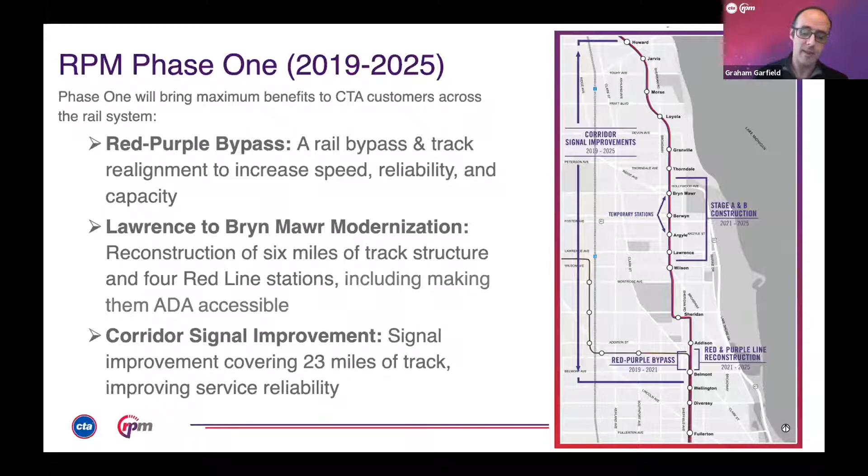Finally, we're doing signal improvements all the way from Belmont to Howard at the end of the Red Line. Even though a lot of that area won't get rebuilt in terms of track and structure, bringing what is currently a 1970s-era cab signal system up to current standards will not only increase throughput, but also simply improve reliability, given that a lot of the parts and infrastructure are becoming difficult to maintain and replace.

So what are the benefits? The benefits extend not only to our passengers, but to the communities. For those of you not familiar with this part of the Red Line, it passes through very densely populated neighborhoods. These are primarily neighborhoods of apartment blocks. There's retail, a lot of mixed use. It's very high density. Our neighbors are right next to us.

So we're bringing benefits to them through improved infrastructure as well as to our riders. They include faster and smoother rides through the provision of new tracks, bridges, viaducts, and the aforementioned signal upgrades, which will not only allow faster rides, but also quieter ones. By upgrading the signals and improving the track and structure, it allows us to provide more frequent service, which reduces crowding. And I mentioned the 4 new Red Line stations that will be fully modern facilities with ADA accessibility, so that we can have mainline transit access to more of our constituency.

It also provides economic growth. There's economic benefit to these stations, of course, just for the local communities, but we wanted this project to go farther than that. So we've developed programs for workforce development as well as a high level of SBE and DBE participation. And finally, we also have transit-oriented development planned post-construction for lots that we needed to buy and clear for construction staging and operations, but will not be needed once the project is completed.

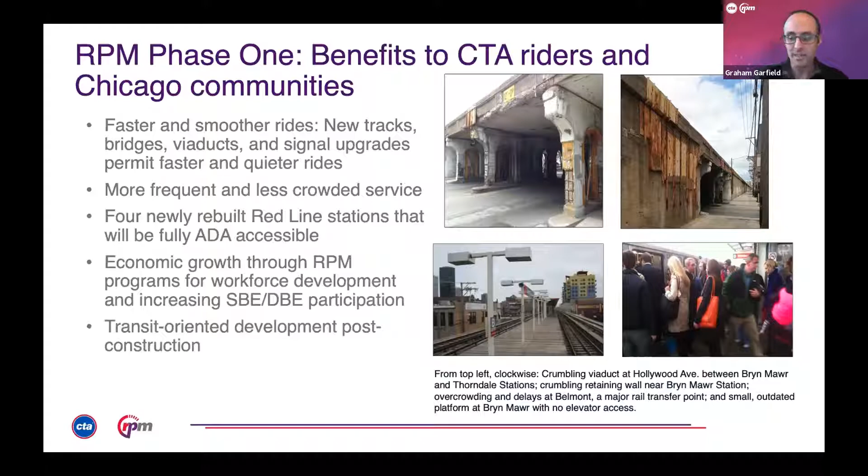So just a quick rundown of some key dates. This project has actually been going on for quite some time. We're really now in the very heavy civil construction phase of it, when a lot of it is very visible. There are things that, on the street, you can actually see taking form. But we've actually been laying the groundwork for this for quite some time.

As far back as 2018, we began a 3-year period of advanced utility relocation, working with a lot of local utilities, both public and private, to relocate infrastructure within the project footprint, so that when we began excavating and moving things around, we would not create any interruptions to those utility services. We had a project groundbreaking in 2019 for the bypass.

From 2020 to 2021, ending just this past May, is a phase we call pre-stage. For both the LBMM, the Lawrence to Bryn Mawr area, and the RPB bypass area, there was a lot of work we needed to do before we could even begin the main work - preparatory work and some more modest upgrades and improvements. But this was especially significant up north in the Lawrence to Bryn Mawr area, where we had to install

2 brand new interlockings at each end of the corridor to allow us to merge and sort trains from 4 tracks to 2 tracks through the construction area, as well as build some temporary stations and other pre-stage support work. But we're now into heavy civil construction in both of those areas, and the bypass is almost ready to be completed. We're going to show you some pictures of that, and Chris is going to speak to some of the exciting progress in that area. Construction of all 3 areas - the LBMM, the bypass area, and the signal system - is going to continue into 2025.

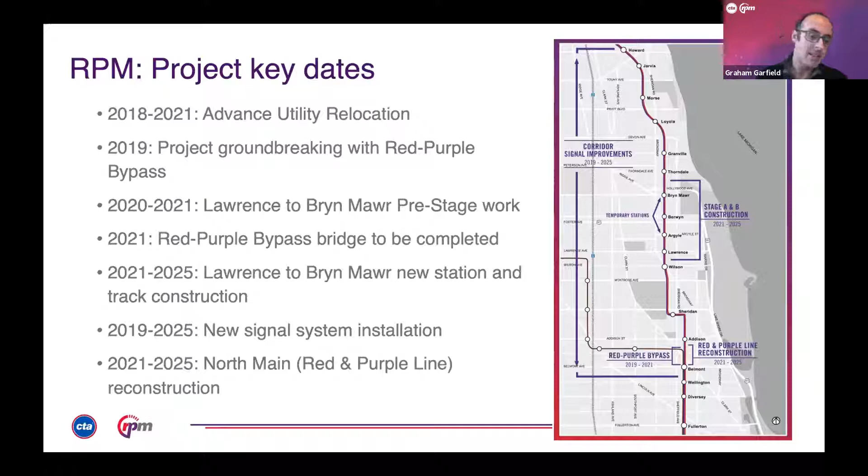So what are some of the challenges we face? Well, one of the biggest is simply that we're dealing with a century-old structural system, the existing elevated structure, and a signal system that itself is getting a little long in the tooth. The oldest parts of it are now 50 years old, and they're becoming difficult to maintain and keep in a good state of repair.

But part of what's challenging is not only that they exist and they're hard to work with in and of themselves, but because the project has to be built in phases with a lot of staging, in many cases you're having to, on a temporary basis, have new components interface with these 100-year-old structural systems or 50-year-old signal systems. That's a challenge as well, getting those 2 eras of technology to talk to each other, even if it's only on a temporary basis during construction.

As I mentioned, all these project areas are in densely populated urban environments. This makes a number of things difficult. One is just moving around - being able to perform basic construction functions is a challenge when you've got buildings and neighbors just a few feet away from your project footprint. It also creates challenges for staging materials, for assembling some things off-site, for moving equipment around. It requires a lot of very careful coordination with the community to minimize our impacts to them.

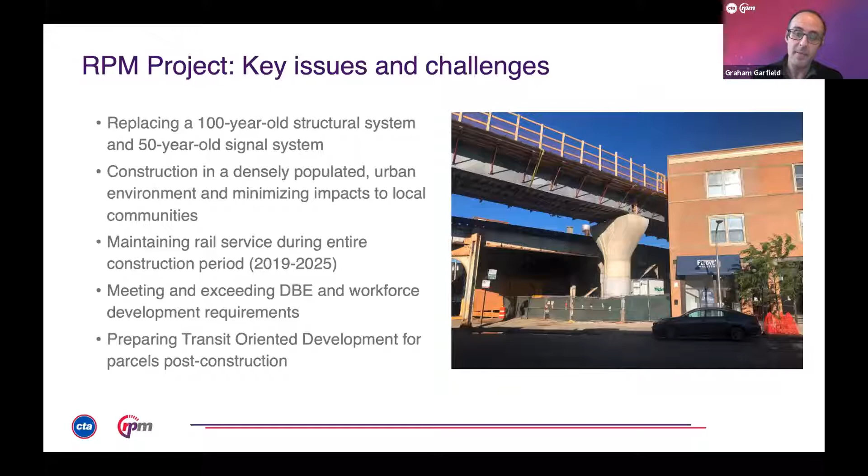As I mentioned, we've set very high DBE and workforce participation goals for this project, and that requires very close coordination and planning. And finally, those transit-oriented development opportunities post-project are also going to involve a lot of very close coordination, not only with city agencies like the Department of Planning and Economic Development, but local elected officials like aldermen and state reps, and local community groups as well, to make sure that what we do with these parcels not only brings benefit, but is also in keeping with how the community envisions development occurring in their local area.

So the last area I'll touch on before I hand it over to Chris to get into some of the really fun, exciting construction updates is the idea of coordinating with our transit operations. It's a big part of the project, and it's a big part of my job. We have very close coordination with both our service planning group and our transit operations groups, which, as I mentioned, is primarily rail operations, but there's bus impacts as well, and we work very closely with our bus partners too.

The key here is to have a working relationship with them that allows construction to work around transit service and balance the two needs. I wish we could do this without any impacts on operations, but that's not practical. We need to be cognizant of not overly impacting operations, to keep those impacts to a minimum, or schedule them in a way that mitigates as much of the impact as we can.

There's a couple ways we do that. One of the biggest is that there is built into the contract with the primary contractor a total quantity and types of different service impacts they can have to complete the activities for the project. These were developed in the early planning stages before the contract was let, when our construction and infrastructure group worked closely with service planning and operations to go over every step of the project, each phase, and the construction activities involved, and how they could be done around operations, either keeping operations going normally or what type of service impact would be needed. So there's a whole series of planned impacts for basically a 5-year period for every activity.

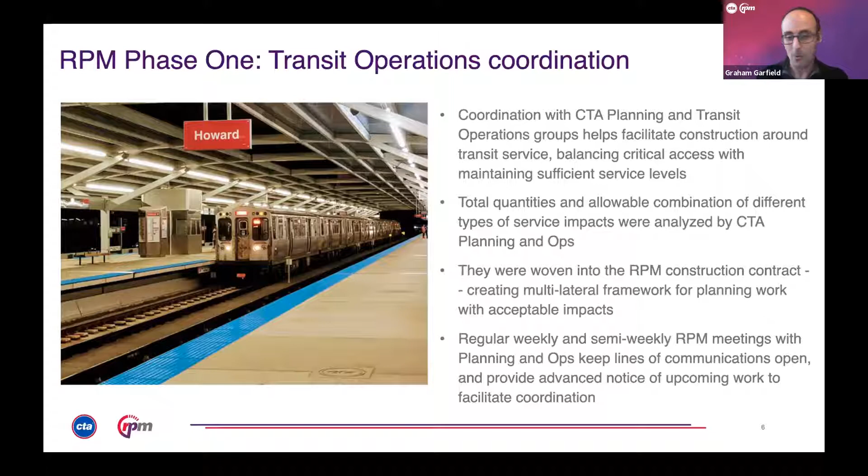So I want to underline a couple of things here with regard to Graham's participation in this project. He's very modest when he describes his role. We have integrated him into this, given the length of this project, the complicated nature of it, and some of the various challenges. One of the challenges we're facing is having the right number of people staffed on the project, both from a CTA and consultant perspective, as well as a contractor's perspective. Labor is tight everywhere. We've all read this in the paper, but particularly on large projects, even historically before the current labor shortage.

So Graham has become a very integral part of our project team, both from the perspective of communications, because we do need to turn on a dime occasionally and understand exactly how to communicate. I certainly can take care of our front office and talk with them. Although it is a bigger challenge, I think, for us to get a message out to our customers, get penetration of that message and an understanding of it so that people aren't confused by some of the construction that goes on.

And also, as Graham will show you in some of the subsequent slides, the installation of various pieces of infrastructure, particularly as we're connecting things—the bypass would be a great example—and then moving to the next phasing, it becomes very complex. Some of you out there, I went through the participant list, and there's a couple folks on this call who probably have forgotten more about this than I'll ever know.

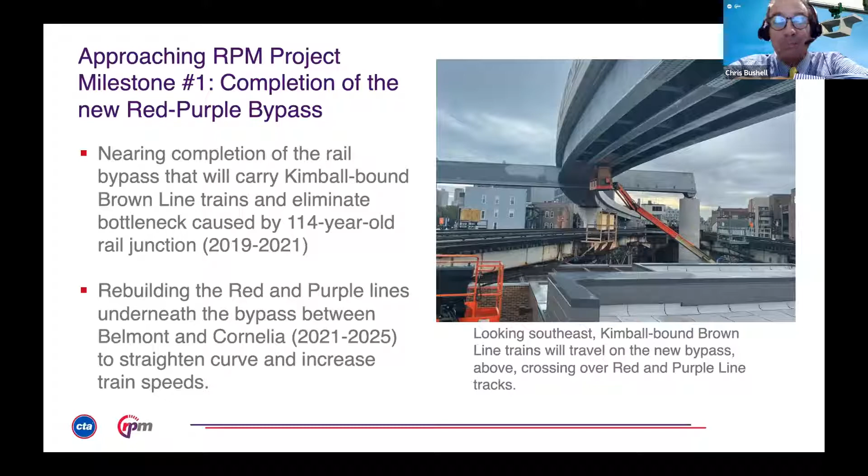The basics of the bypass were really in place in the design that CTA worked out ahead of time. The contractor knew they had to get on the ground and execute that design quickly, so they made minimal changes to it. But the development of the aesthetic package was pretty important, since this is a neighborhood very close to existing residential and business areas. You can see in places the bypass is only inches away from adjacent structures.

More importantly, at cross streets we wanted to create rooms that were as pleasing as possible being under a rail bridge. We wanted columns that reflected an overall design — they were pretty bulky columns, so we wanted to bring in some aesthetics that would break them up visually a little bit.

We are doing a lot of lighting underneath the viaducts. It's not just for security, it also creates a pleasing visual at nighttime. So you are both secure and can see through it, yet there's also a visual interest there. Again, we're trying to soften this infrastructure and integrate it into the community in thoughtful ways.

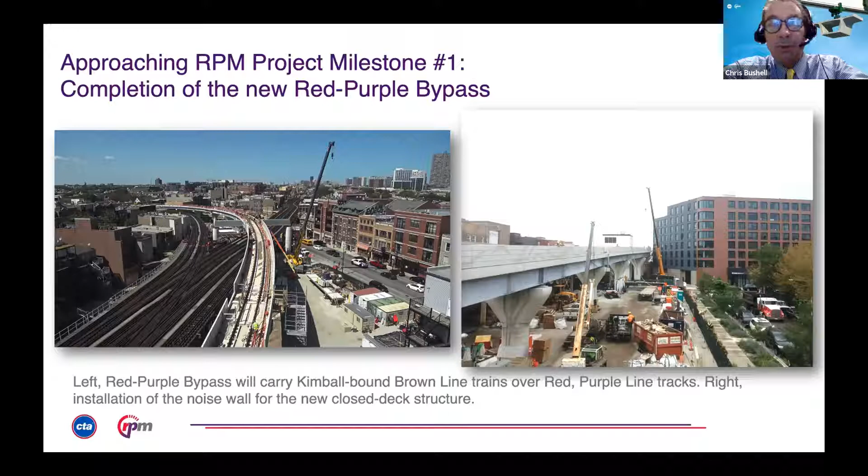In the coming weeks here, I can walk through this. We are attaching the bypass to the Brown Line Kimball tracks. We've done that already, actually. We have installed the interlocking to the north. At Kenmore, there's actually another part of that interlocking that gets installed after the bypass is in service, but the main turnout that connects the bypass to the Brown Line tracks was installed the weekend before last.

That was a good operation, went smoothly, on time, no major issues, minimal impact. We did do it during a line cut, as one would expect. It went well, we were pleased. The contractor is performing this work with in-house labor, so we were a little conservative on what we let them bite off, but they did very well. They brought on, as you would expect, tried and true folks who had done this before, but as a team it was their first time up on the elevated.

Now we had a second weekend where we came in and did a line cut this past weekend. That went successfully, but there wasn't a huge amount of work because they had finished all of it on the first weekend. So really there was a lot of cleanup and various pieces of structural work to support the new signal system. Some of you will appreciate the interference or the details associated with putting signal platforms in and other various sorts of platforms to support some of the jewelry in and around the track system.

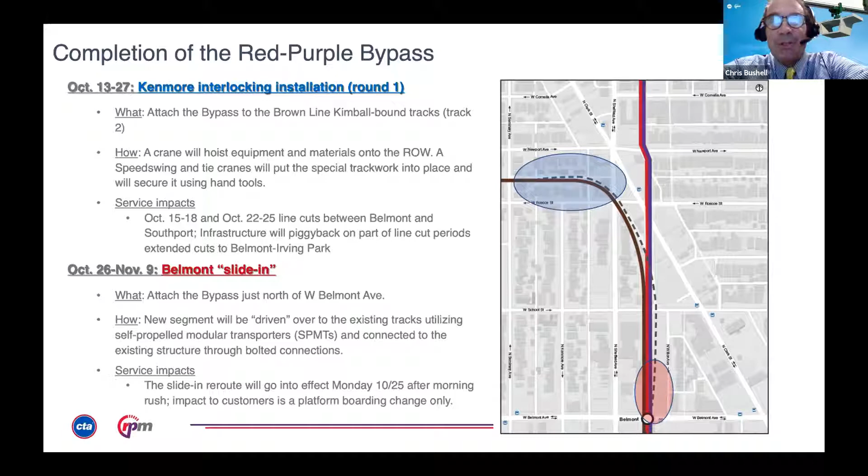Next slide. North attachment, you've got the Kenmore Interlocking up there, and then the bypass facing east. These are some of the first images for those of you who are interested from our new CTA cameras up there. So, exciting pictures of both pieces of infrastructure up there.

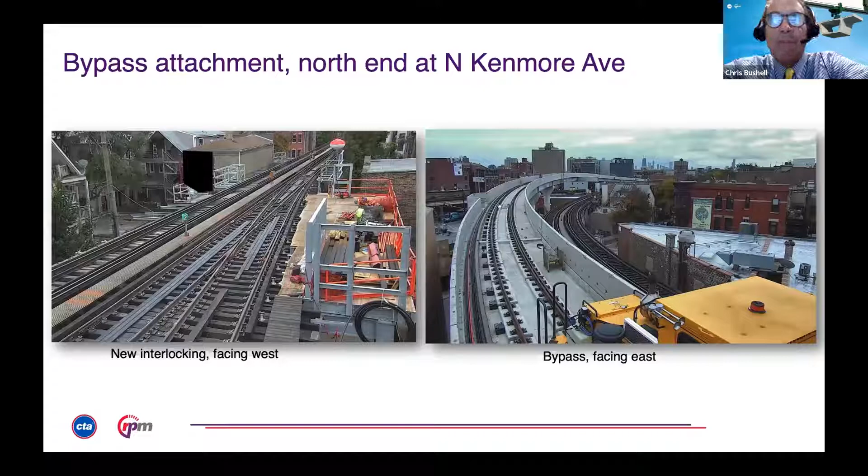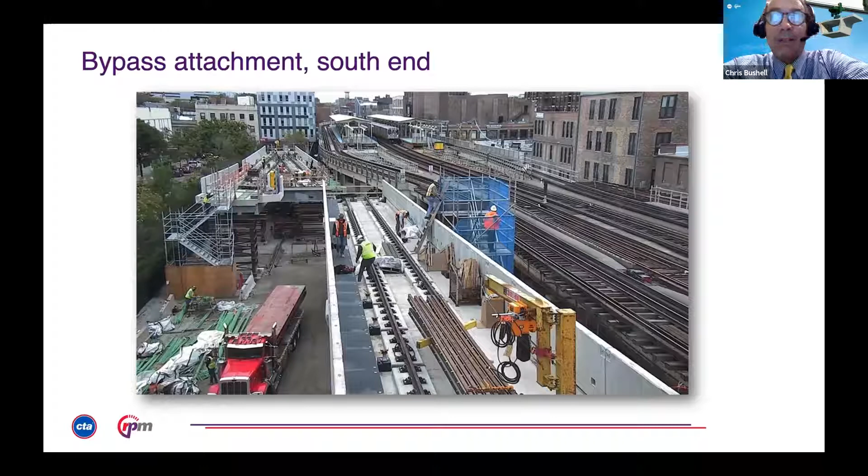But you get a view from this slide of how this would eventually work. As you can see, track 4, the farthest one to the east, gets demolished, and then this whole other piece gets slid in, connecting the bypass on the railroad south end, right by the Belmont station. I'll also add, one of the really nice things here is once this goes in place, we eliminate a little curve out of the station that's kind of a headache for maintenance — a curve where the track tends to wear unevenly given its nature. The curve we're putting in there is a bit better; the geometry is an improvement. So that's a good thing for the consistency of rail service through this area, or at least the quality of it, and the ease of track maintenance going forward.

So we're getting into the next section. The bypass work here continues. We put the bridge over in place, the bypass, and then we start to work on the bridge under.

This is a key aspect of the project because, as many of you can appreciate, the speeds leaving Belmont are relatively slow because of a series of small curves. Many of them date back to the original construction of the CTA predecessors, because back then the people developing this were private developers. They couldn't really condemn property, so they had to work within the property they could acquire. The tracks sort of snaked through, not huge curves, but curves in the railroading sense that were enough to make us slow down the trains through this area and ultimately have a significant effect on throughput.

So straightening those curves, getting a better geometry through that area and raising speeds becomes a critical part of a project that builds capacity on one of our busiest lines.

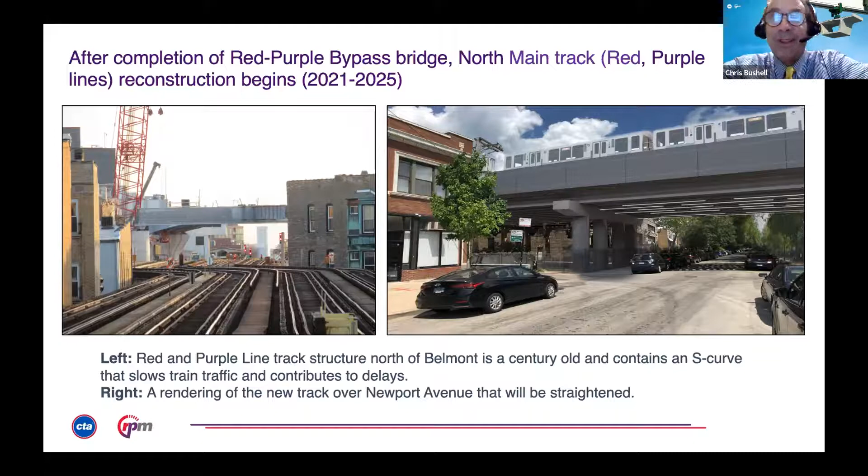All right, great. So the path to the North Main reconstruction: we will start in November with micropile, shoring towers, and cut and throw installations. Graham will talk a little bit about some of the ways we're going to do those cut and throws. Those of you familiar with this project may recognize some possibilities or things we've talked about in greater detail in those cut and throw diagrams.

We complete the bypass. So the bypass is effectively completed, but there are various things that need to be done to get the full functionality of it. Going into December of 2021, we'll start the North Main tracks 1 and 2 demo and micropile work, Kenmore Interlocking round 2 — there's another turnout required to get the full interlocking up there — and then of course the relay house installation. This will be our first digital track circuit house, I believe, and we're excited to see that.

The contractor Hitachi is just completing their overall design effort as they're manufacturing the first houses for the digital track circuit.

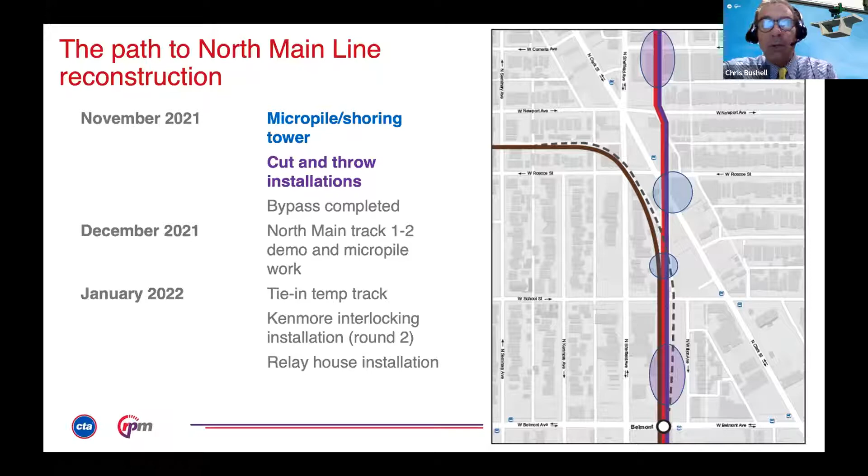And then we are now installing a digital track system, which gives us much of the advantage of, say, a more sophisticated system like CBTC, once we come back later and install digital control packages on our various rail cars. So it's an interesting experiment here and enables us to get some of the benefits of CBTC, or more incremental control of the trains, without going through the type of retrofit that would be needed to do that — which would probably be cost prohibitive at this point in CTA's history unless we did it incrementally by line.

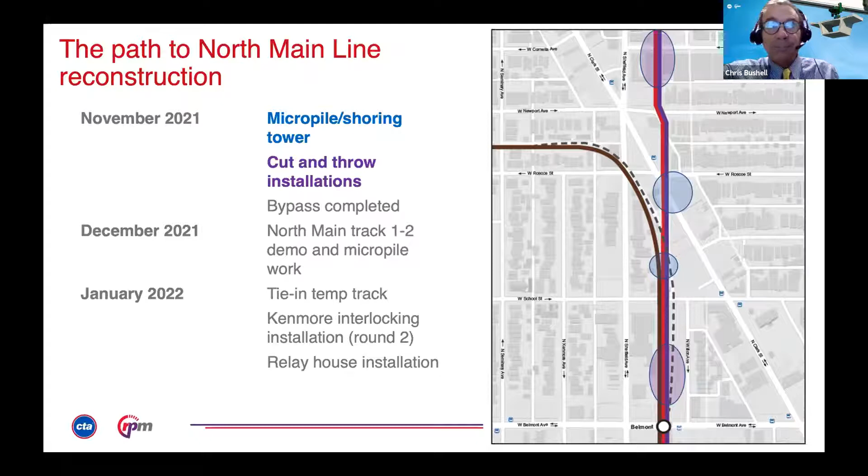Temporary track construction. So in order to get to the point where we can do tracks 1 and 2, we have to actually install a temporary bridge in this area. Temporary has a different meaning for us at CTA than it does anywhere else. It basically means we don't use it for that long, but it doesn't ever look like temporary because there is no real temporary in railroading as a general rule. It's got to be built to the standards that we can run on it.

So it almost always has to be built to the standards of permanent construction. And this has been, many of the pieces of track work here, the older style pieces of track work where we're connecting new infrastructure to old ones have ended up being the trickiest part of this job. Just the basic stuff, getting elevations right, getting the details of the tie layouts right. The segmented box girder, once we're up and running, will be a beautiful thing. It's a pretty smooth operation, but getting to it and getting to the places where we're both interfacing with the community as well as a 100-year-old track system has been some of the major challenges we've had in this project as a whole.

Not unexpectedly, really. And those are the points where we as CTA employees who understand and can bring the resources and the historical knowledge of this infrastructure to the table - that's really one of our highest and best uses, not necessarily to know what the most efficient and modern construction methods are. We're not very familiar, for example, as an organization with segmented box girders, but we have a long history with open deck track. So these are some of the hardest things we're doing, these connection points.

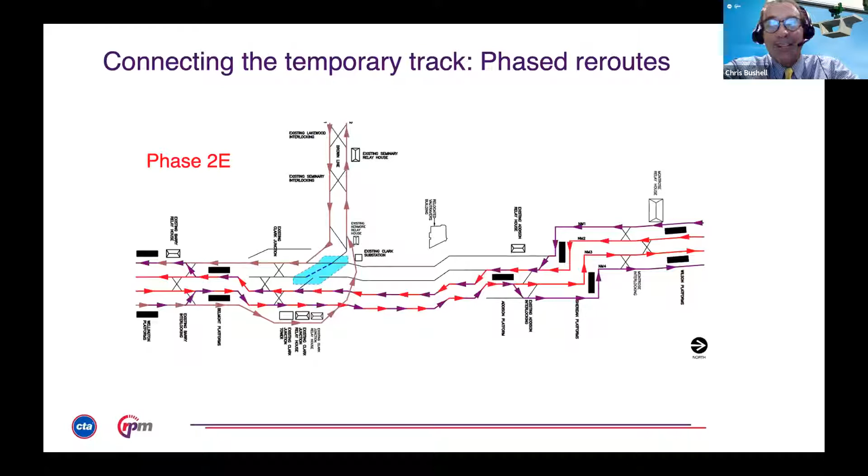Next. All right, I'll turn it back over to Graham. So I thought that this would be a good example.

The RVT track, what we call RVT, Ravenswood Temporary, is what that stands for. Track, putting it in service would be a good example to illustrate some of the operations phasing that we have to do. So as Chris mentioned, in the area here around Clark Junction, as we are up north, we're reconstructing the 4-track main line, 2 tracks at a time. So we have 2 tracks out of service and then all other trains on the remaining 2 tracks through the construction area. In the RPB area, the bypass area, the red and purple line trains, which continue north from here to Howard and the city limits, and then the purples continue beyond that, they get put onto 2 tracks through what Chris mentioned are what we call cut and throws.

Basically temporary track connections where over a weekend or a similarly short period, we sever 2 parallel tracks and put in a temporary connection between them to make a connection. And so you can see on this diagram, the red and purple line trains on either side of the 2-track corridor kind of make these sharp turns, right? And obviously this is a diagram, the actual curves are more gentle than this. But those represent cut and throws that were put in to move them from the middle tracks to those 2 east tracks towards the bottom of the diagram.

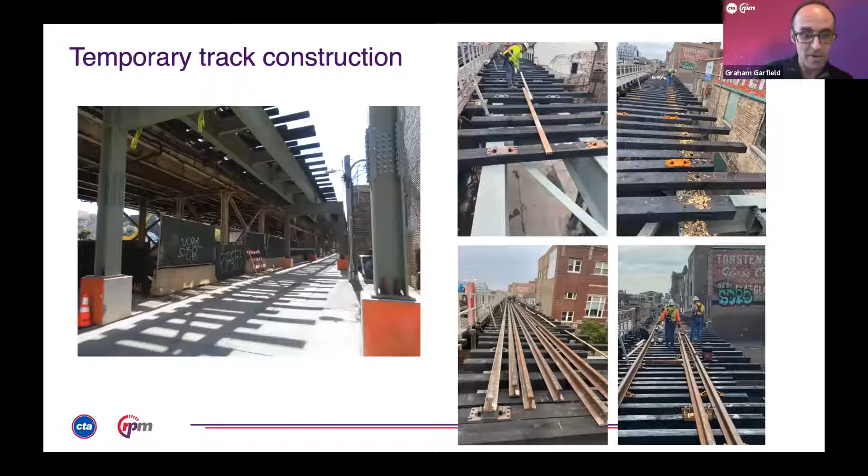But nevertheless, that one block has to be reconstructed, the structure and the track. So that's why the Ravenswood temporary track is built, as you saw on the previous slide, to sort of just vacate that one block of track. We had to build this structure here over the adjacent alley. And so you can see the new track obviously is the gray structure, and the existing structure is the sort of rusty beige.

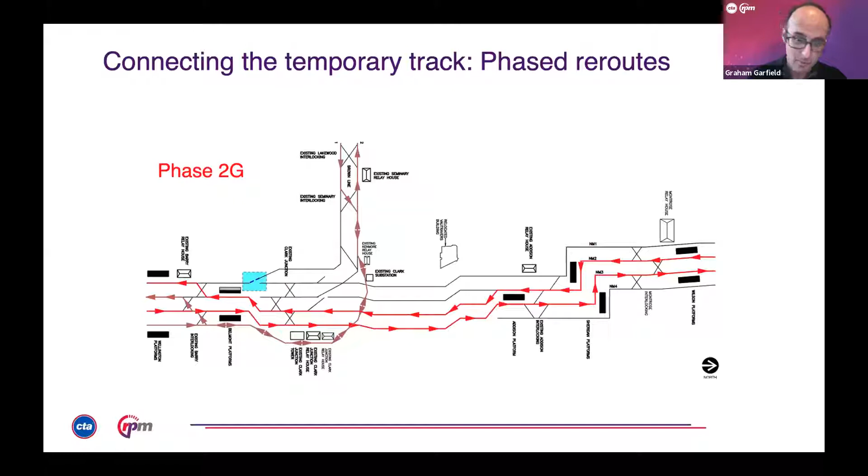That's quite a bit of rerouting to do, basically for a weekend's work, just to make that connection. But we now have to connect the other end, which requires vacating track 1 nearer to Belmont Station. And to do that, we run a single track, with trains sharing the same track in both directions, via the bypass, because there's really just no other way to vacate that track 1 immediately adjacent to Belmont Station.

This is where planning for some of this permanent infrastructure required taking a more holistic look, because a piece of infrastructure like the bypass needed to function not only for its regular service needs, but also for emergency needs, unplanned service changes, and future phasing of the project like this. That's why it's built with bidirectional signaling, and why some of these crossovers that aren't needed in regular service get installed — it's for construction phasing.

So southbound or inbound Brown Line trains use an existing crossover that you can see up there on the branch towards the top of the diagram. They share the track, alternating, taking turns through a very closely controlled process that operations uses, to use the bypass in the reverse direction, or what we call against traffic, all the way to Belmont Station. And then it uses existing crossovers to go back to normal.

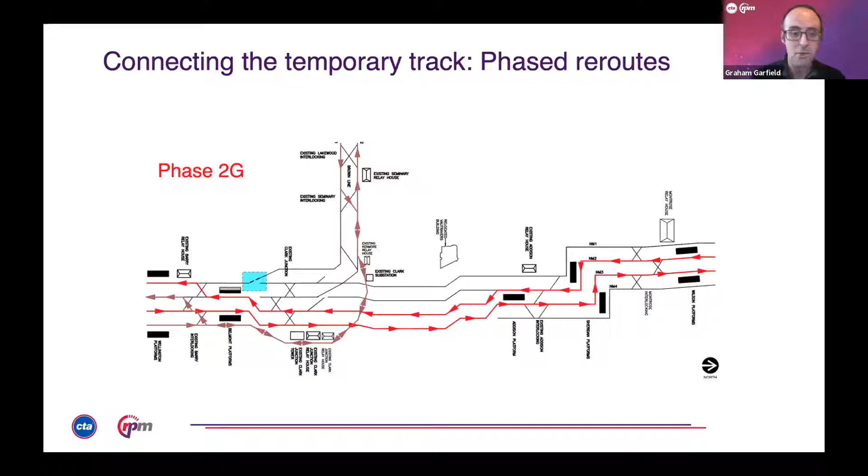So you see in the dotted aqua blue corner there where we're putting in the additional track connection. And then when it's all done, they use that Ravenswood temporary track to skirt around the construction zone inbound while using the bypass northbound.

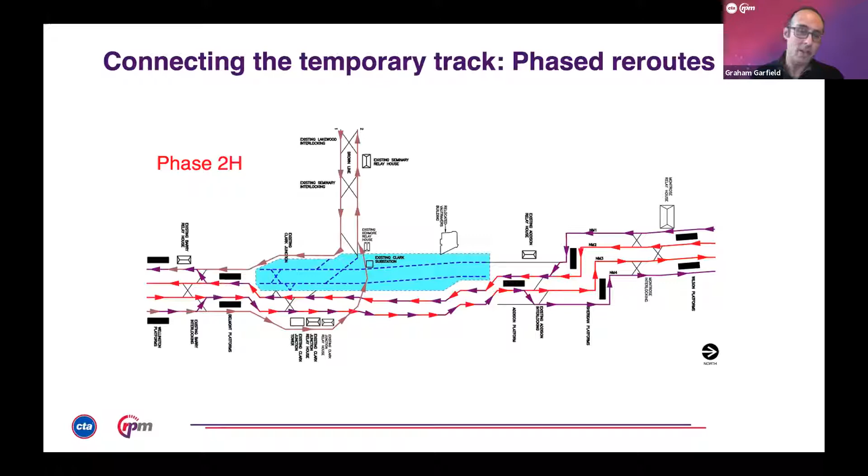And at that point, we're able to fully reconstruct tracks 1 and 2 between Cornelia Avenue, just south of Addison Station, and Belmont. So this is indicative of the type of phasing and careful staging and service impacts that we have to implement to maintain rail service around these rather intricate construction activities.

I'll turn it back over to Chris to take a look at the exciting new stations we're going to build up north.

Yeah, thanks, Graham. And those of you that know Graham know his familiarity with the railroad and our ability to work with operations can see why his role is so integral here.

You know, many of the steps that we're proposing we did set forth in the original phasing, but some have had some fairly significant modifications. For example, I think the slide-in, crazily enough, was a weekend piece of work originally. It's probably possible to do the demolition and then slide it in using those self-propelled modular transporters, but I don't think it's very practical. Extending that time to 12 to 14 days made a lot of sense, both in terms of getting better testing, better closeout, better safety certifications.

Those were the kinds of things that Graham and other folks from planning — we had some folks from the planning department originally on our project who were very integral to some of the environmental work — really worked through a lot of those details. So you can kind of see how, once we get to the point where we're building tracks 1 and 2, there's a certain level of efficiency.

Getting through each of those weekends and the planning, that's really where we're the riverboat captains helping the contractor through a pretty complicated part of the river so they can get to more open water and gain some speed.

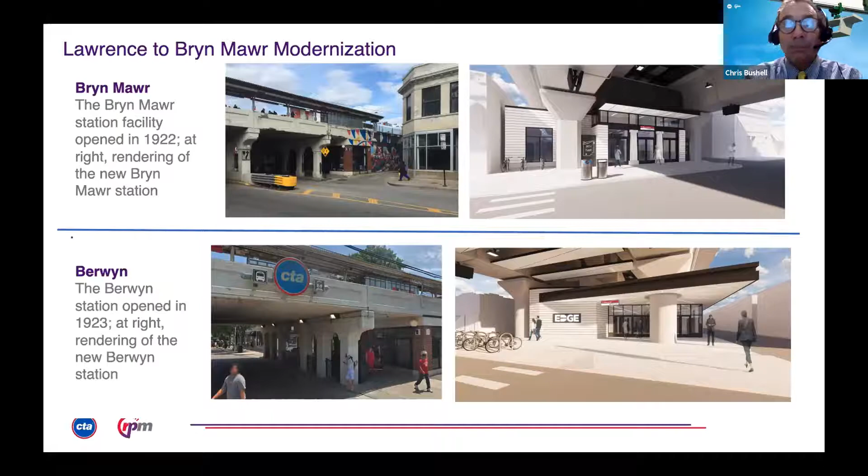At Argyle, we worked with various community associations, including chambers of commerce, that wanted to honor the Asian traditions up there, so we worked with them to incorporate various elements into the design. The pagoda and some of the other things will be relocated in that area. There's an Asia on Argyle sign right to the west of our station, which will be relocated within the community, as well as the pagoda. So we're working with the community on those sculptural community-based elements.

We talked about rooms a little bit on the bypass, how the bypass, as it goes over a street, creates a room that we wanted to soften the edges of, so that it wasn't sort of raw, major, heavy infrastructure in the middle of your neighborhood. Similarly, we realized that the area under these stations, as you approach the station, is actually the first room of the station, and providing lighting and other architectural features there to welcome you in becomes an element of good station design.

We've seen the manifest improvements of that within the community in stations like Belmont, Fullerton, and other of the Brown Line capacity projects that we've done.

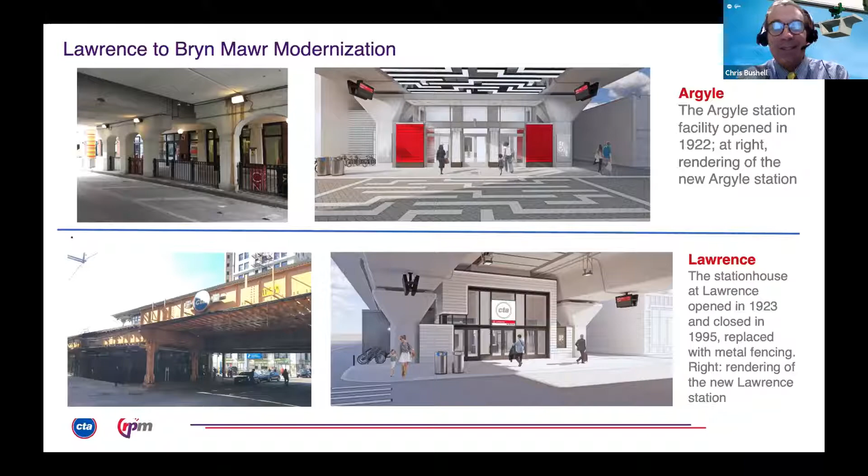So the status of this work, for the most part—I'll get to the end here. We had a little incident with a caisson drill rig, but in general the phases of this work were demolition and the installation of earth retention systems between tracks 2 and 3, so that we could run trains on 3 and 4 while we did work on 1 and 2.

That ERS system is in at this point. We're installing the last of the tiebacks on it. It's gone quite well. The demolition—I think we took down our last viaduct last week at Argyle.

It has progressed generally smoothly, as smooth as this work can go. We had to close streets or areas for a little bit of time, either on a weekend if it was a major street, or a little longer if it was a neighborhood street. But generally speaking, finding the right place to demolish, the right techniques.

We do something in the industry called construction process plans. We dip our toes a little into the contractor's means and methods, really just to vouchsafe and make sure our customers and employees are safe. We want a lot of detail about what the contractor is going to do ahead of time, to make sure there's very little improvisation on our projects. Those construction process plans are a ton of work for the contractor to work through the details. We ask a lot of questions, but generally speaking, the details were worked out well in advance for this demolition, and it occurred very smoothly.

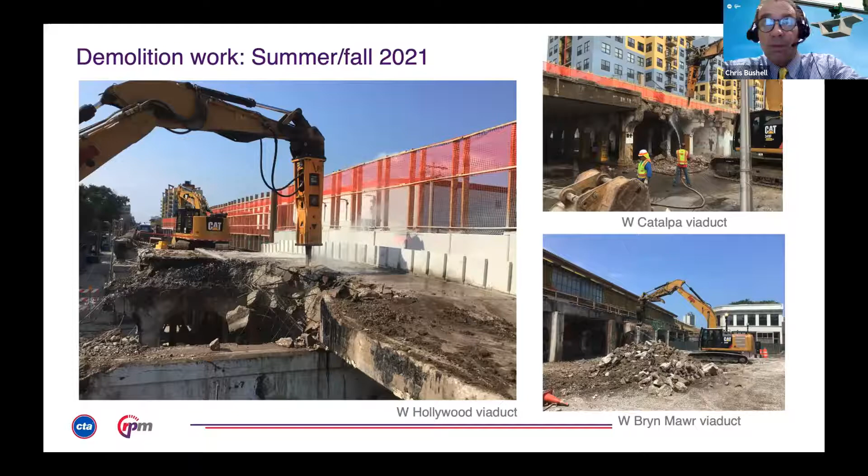Drilled shaft work—we're using a slightly different type of piece, a slightly different caisson rig than we used in the area of RPB. We have an oscillator on this rig. We were using IMT equipment, Italian-built equipment, up until recently. We got the parts, and the parts have gone well.

On Lawrence and Bryn Mawr, the ERS I talked about—putting that earth retention system between the two tracks so we could do work on one side and run on the other—the demolition of the wall, we're doing a lot of different wall demolitions. We're creating ramps so pieces of equipment can go up, and then, as I said, we're demolishing the viaducts. That work has all gone well, on or slightly ahead of schedule.

The drill rig, actually, we had some struggles with—the contractor had some struggles starting off using these rigs. I would expect some of that, as their productivity builds to what it's required to be in the schedule. But because of the closeness of these rigs to the buildings, maneuvering them into place was a challenge. Not much in the way of discovered conditions once we started to drill.

Some of the supportive excavation work required in some of these areas, to support the oscillator or the drill rig, was a little complicated. That generally went pretty well though. It was really just the drilling itself we had some challenges with—various technical details about how the equipment attaches to the casings was a little tricky. Once we were really starting to get it down, the contractor was starting to get it down, when we had the incident.

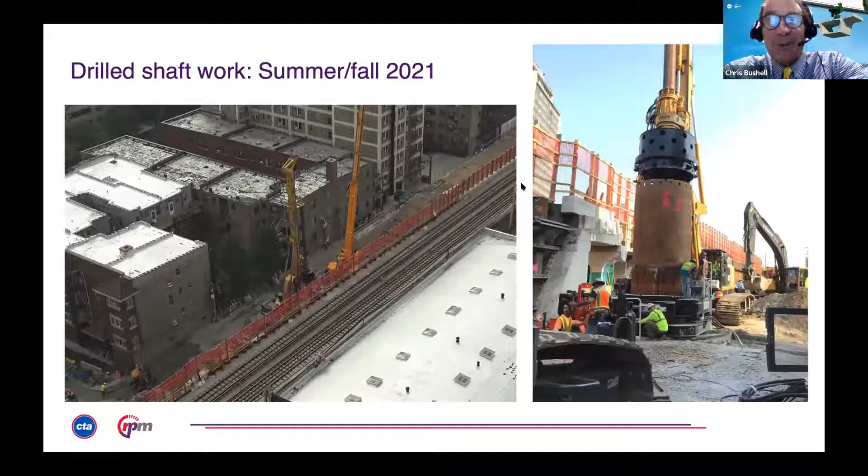So let's go to the incident. I'll be quick about it. I just wanted to thank Walsh Fluor. They are really kicking butt, and they're doing a really good job. They're trying really, really hard. So we were drilling a new caisson.

The rig became unstable, fell over. Thank God, no one was hurt. No one seriously hurt. Minor injuries to the operator. He was treated and released. The mast of the rig came down just to the side of an existing apartment building, missing it by feet.

So it was a serious incident, probably the most serious construction incident I've ever been a part of. Thankfully, there weren't a lot of injuries or fatalities. That said, we're taking it very seriously. We're looking at the root cause. We're looking to see what we can do to improve the safety of the project going forward. What kind of equipment, what kind of loads, and how we can make sure that this type of incident doesn't happen again on this project.

But I didn't feel like we could have a presentation on it without at least showing you a slide. And if there's any questions, I may try to be a little general in my answers just because the investigation is still underway, but I'm happy to try to answer any questions we have if we get to that.

But it was scary, it was serious, and we keep the safety of our employees, passengers, and the community first and foremost. We issued a stop work order immediately after this, only lifting it for the rest of the work after we did kind of an overall safety review. And then, we still have a stop work on this pending the completion of the investigation and mitigation going forward. So no caissons are being drilled at the moment.

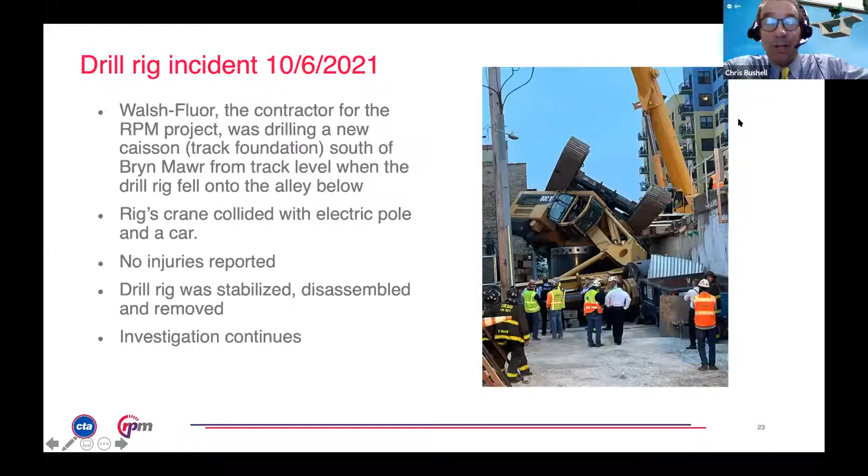So the gantry, the loading gantry, the launching gantry rather. This design, this approach, most of you are familiar with it in the industry. Design construction will result in faster construction, fewer impacts. The real benefit to doing this is we get longer spans and we have to do fewer caissons in general. We get basically double the span, and that enables us to cut the number of caissons in general to about a quarter of what we would have needed to have. So where you have 4 in a bent, you probably just need 2, and where they were 50 feet apart, they can now be over 100 feet apart.

Additionally, the fabrication of these components is mostly done off-site. They're shipped in place, and then they can be installed using this gantry, which installs them in a linear fashion rather than a large crane, which as that crane is swinging a heavy load over a street, over a building, over live trackage, we would have to take various and sundry safety precautions. In this case, we just load the segments up and then put them peer to peer. We pre-tension them, and then we move on to the next, or we post-tension them, and then we move on to the next segment. It's a pretty straightforward process once it gets rolling.

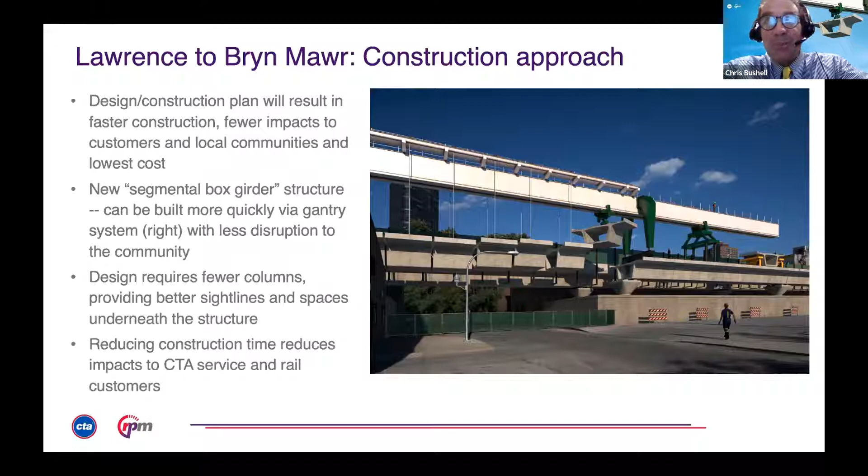It's the hard part about getting the gantry up there, getting it ready to the point where we can construct on tracks 1 and 2 and run on 3 and 4. Those are really the parts that were more challenging. Although this is a big thing, I don't know if we have any pictures of it, as it was just assembled and put up on the piers. There we go. It is about as long as a football field, or I'm told a 747.

They're using various pieces of their modular equipment to move the gantry in place. The gantry is made by an Italian company, but much of it was built in China at their facility there.

Deal is the company that Walsh Fluor is working with to build the gantry and to do the geometry control and the forms for the individual segments. If you get a chance to go up there, this is a huge piece of equipment.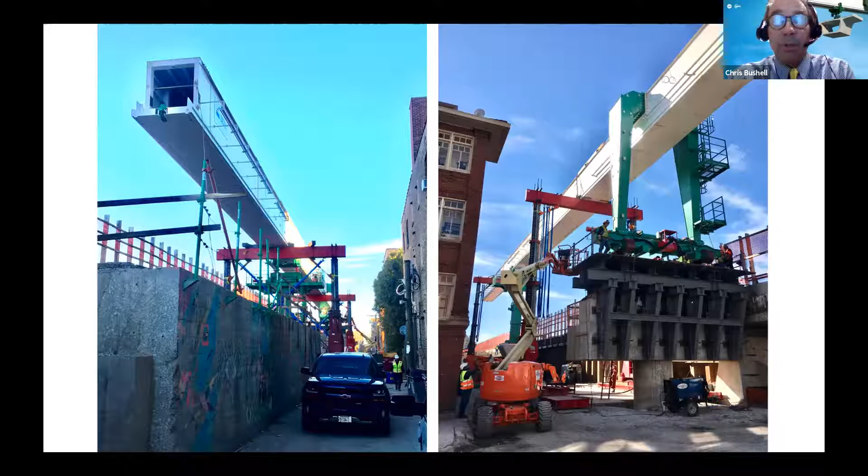We've got it up on piers now, and in the next month we'll be putting our first segments in place. After we get the first segment in place, you can see a picture of one right here. We will then install another gantry—there is the launching gantry and then the loading gantry.

The loading gantry is sort of the little baby brother of the launching gantry that gets installed in the street at Ardmore, and then we have four loading places. As we're done with the segment at Ardmore, with a stretch of it, we'll move it down to another street, and then we'll build it all on the east side, and then we'll bring it back up to Ardmore and do the west.

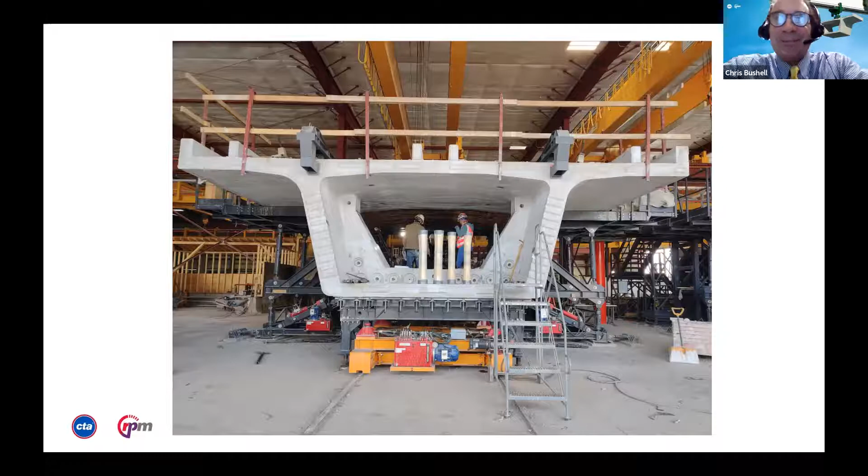So we're just going to wrap up with a quick mention of the workforce goals and efforts that we put forward on this project. If I go through it a little bit quickly, to be clear, it is not due to a lack of importance—this is actually something we take very seriously. Our president and our chairman also consider this of great importance to the city, and we feel the project can really be beneficial beyond just the infrastructure improvements it provides.

So an important part of this project is to be as inclusive as we can. This involves maximizing the amount of business opportunities that we can provide to either small business enterprise, or SBE, or disadvantaged business enterprise, or DBE, individuals, entities, and groups to work as subcontractors on the project.

So to ensure that the work is spread around, we attached a 20% goal of the project's design work to go to small businesses, as well as separately 20% of the construction work to go to SBE or DBE enterprises.

We also placed workforce goals in the contract, and these goals include requiring at least 10% of the labor hours go to individuals who qualify under the Workforce Innovation and Opportunity Act program, 35% of the labor hours from the lowest income zip codes, and 15% of labor hours from union apprentices.

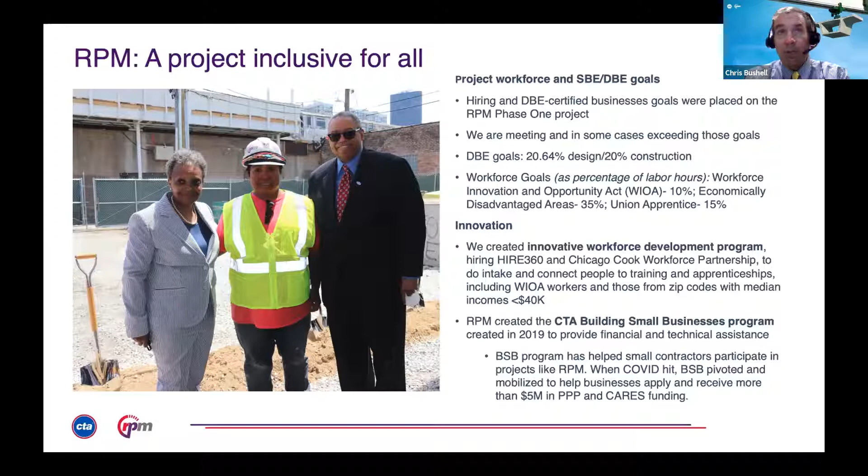While this project is taking place in the north, we've bent over backwards to not only have a robust DBE effort, 20% and 20% for design and construction, but also workforce development. With the labor shortage, we've used that to the advantage of incoming apprentices. We've seen a good apprentice workforce on this project, building skills for the next large project on the south side of the red line extension. We'll see folks trained as apprentices here, particularly in the electrical trades, go on to six-figure jobs as journeymen on the red line extension project. Big deal. This is a project for the whole region, not just the north side of Chicago.